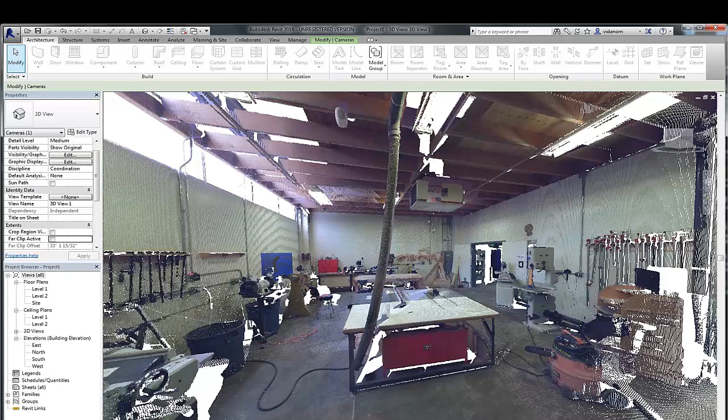Autodesk has made this possible. We have an AutoCAD division, they have a building design division, we have an infrastructure division, a mechanical division. Now they have a reality capture division that's focused on delivering the physical world to be able to compute it, make it accessible, and make it useful for everyone.

So it just started over a year ago, maybe a year and a half ago, and within such a short period, we are now capturing data with all sorts of design tools, 3D scanners. We're using photographs, we're using hand scanners, we're using iPads, sensors, you name it. If you can think about it, we're capturing the information and putting it into the design deliverables. And what tools do we use to do that?

Autodesk Recap. Recap allows you to load intelligent 3D data, either from scanners or from photos, billions of points at a time. Recap is a single word. It's kind of confusing to people. Hopefully everybody understands now it's reality capture. But there's multiple versions of Recap out there. Whichever one we're working with, and we're going to break these down today for you, the goals and ideas are right here: end-to-end workflows.

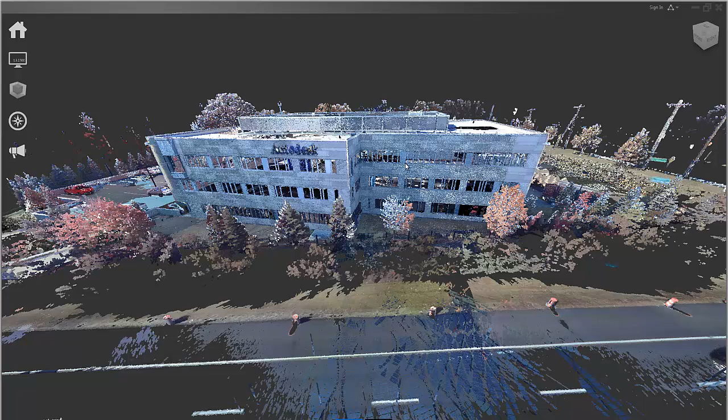Scans are taken anywhere from a minute, maybe a minute and a half if they're black and white, up to 5 minutes using color. So what are they useful for? What can we do with it? Well, at any time I can pull any distance from any XYZ coordinate that was captured in here.

If you zoom in a little bit, you can see that every single point in here has an XYZ coordinate. And as I zoom, you can see each one of those points. And each one of those points is information that we can use to gather the distances.

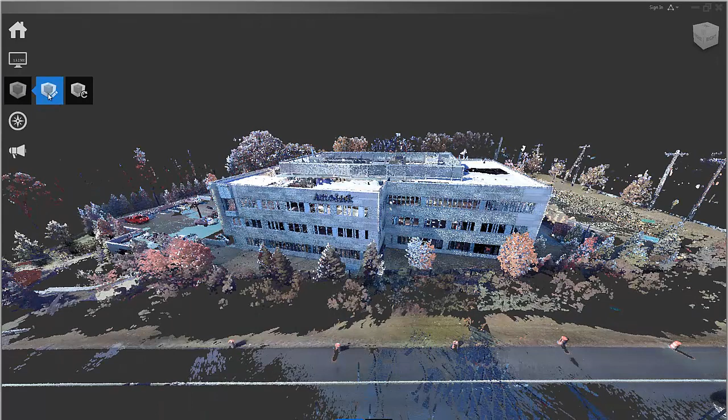Besides that, let's have a little bit more fun. We can go in here and we can create a limit box. Inside this limit box it's pretty easy to navigate. You just drag this down. And we'll go underneath it here and we'll drag this up real quick. Narrow down the data. Let's get it quite a bit closer quickly.

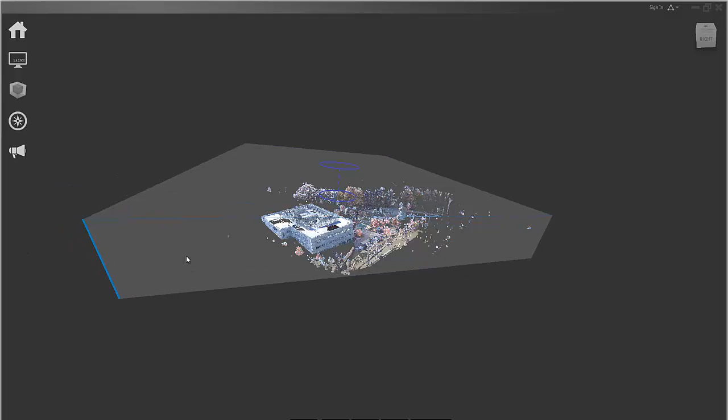There we go. Some of you already saw what I did. I was able to actually rotate this as well. So if you want to go up and down, or depending on which side you grab it, you can rotate it as well. So if you want to go perpendicular to the building, you could do that as well.

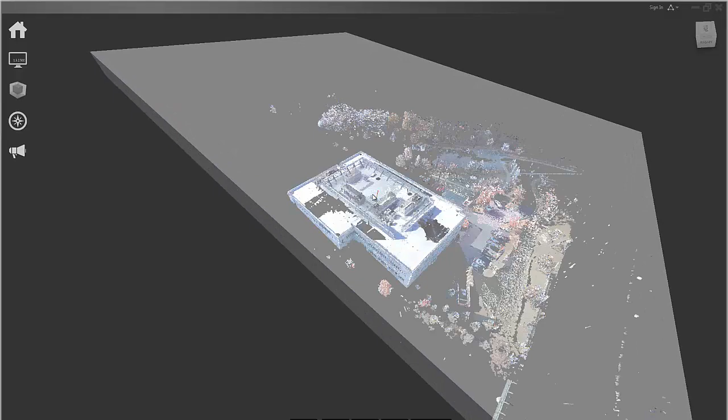Once you're done, you can simply confirm this. And you can always go back and modify it again. And what's really cool is you can just drag this and you can literally look directly inside the point cloud. So we can drag it from both directions. We could go this way. I could go underneath it, and we could drag it as well.

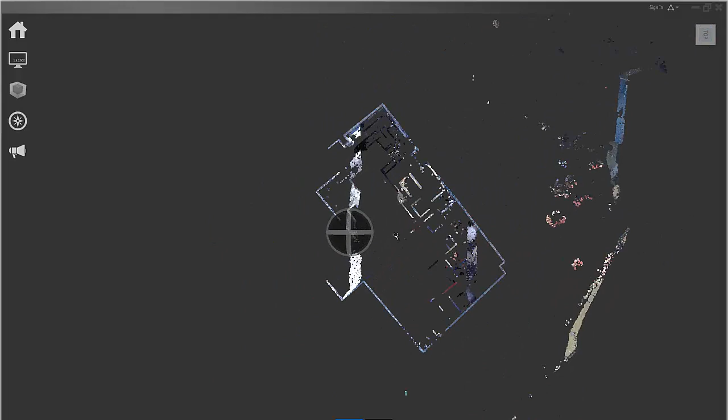There's also options in here to change it to grab the inside face or the outside face to fix that or make it a little bit quicker. But now we can launch this back to 2D. Right? And from 2D, I could take this to AutoCAD and I can start drawing directly on top of this. Or I can take it to Revit to draw directly on top of that.

So just keep that in mind. The most important thing, and you're going to hear me say it 10, 20 times during this WebEx, is we need to narrow down the data to focus on what's important for this project.

Another way to grab or save what I just did is you can create view states. Any limit box, if you like it, you can save it. So I went in here and I quickly made one of just the lobby. I zoomed in, saved it, and now I can return to it at any time.

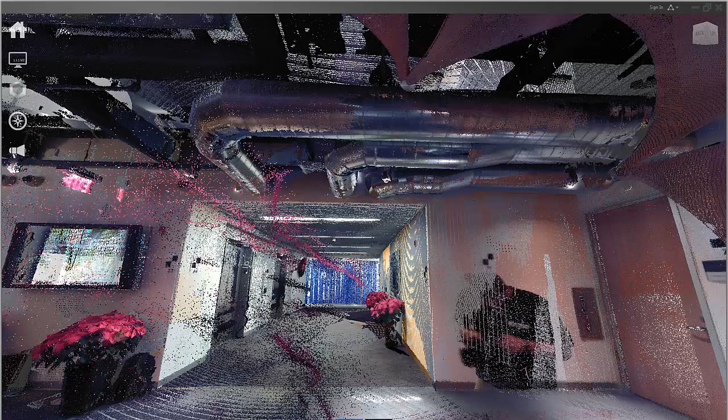It makes it really easy to collaborate with our consultants, our design team, if we want to talk about, let's say, just the piping up above. In this case, I could go in and we could window just these pipes to talk about it maybe later on. Simply fence the information that you want.

Once it's fenced, I can go in and I could say clip everything outside it. Now the point cloud is focused only on what's important to us on this project.

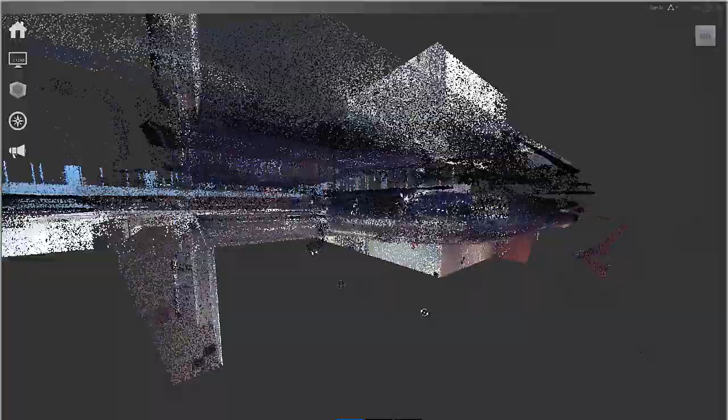One of the tools inside Recap that everybody forgets about: at any time I can go up here and we can export that information that we're looking at as its own RCS file. So now I can work with it inside of Revit or AutoCAD or any of the design information available to us in Design Suite.

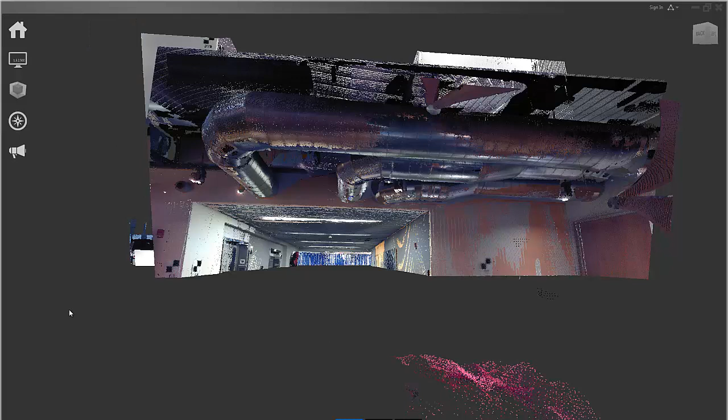Let's undo that real quick. Just want to point that out, how all the data is so accessible and how easy it is to access. I call this the Google Room.

Again, we have a virtual site that we can share at any time. This project might get delayed for 6 months, but it doesn't matter because I captured it. I don't have to remember every measurement or what was there. I can just go back to it without going to that new location.

I call this the Google Room, because this is where we can brainstorm. We can sit down, talk, and discuss different things about how we're going to approach this project, including what measurements the person who went in there might have missed, and put it on a piece of paper.

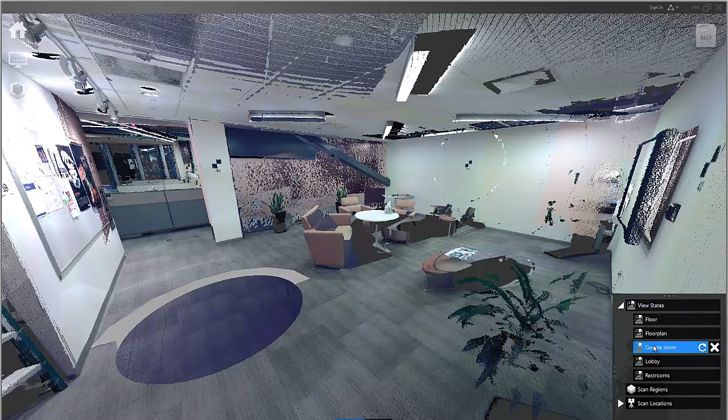Would you bet in this room that you could get every single measurement? Would you bet your job on it, or would you want to go back? In here, we can go in and pull any measurement that we want.

The measurement shown here as well, we can adjust. If you don't want to use metric, you can go to your options and show feet and inches to the 1/8, which is kind of cool. If you don't like that measurement, you can also get rid of it.

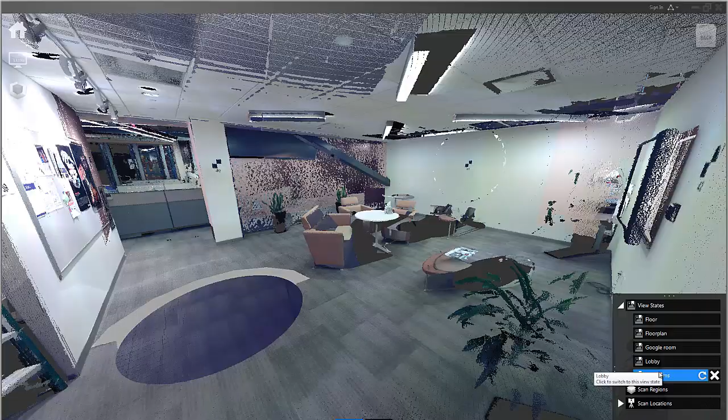So again, saving your views. A couple other ones we looked at: the lobby, the Google room. We can even go to maybe the plumbing, or take a look at the restrooms. I'll spare you actually going inside the bathroom.

I think everybody knows what bathrooms look like, but we could simply take any measurement we want, or make sure we document everything that was inside there before we tear it all out and put it back. You can see the lights up above, the drinking fountains, and the restrooms.

Once I go to Navisworks, I'm going to show you this exact same view, or a close area of this model as well. So looking at the viewport, the scan data is great, and the virtual information is available to us, but what else can we do with it?

Kind of like I was trying to show you a little bit ago, I want to make a floor plan. All I do is take that limit box and put two together, and now I can export this and take it to AutoCAD and draw on top of it.

Maybe I want to take it into Revit and use this as a guide, to make sure I didn't miss any walls. To have a Revit BIM model, I can literally take any existing conditions now, capture with scanning, draw it, and just like a BIM model you would for a new design, I have it for any existing building that I scanned.

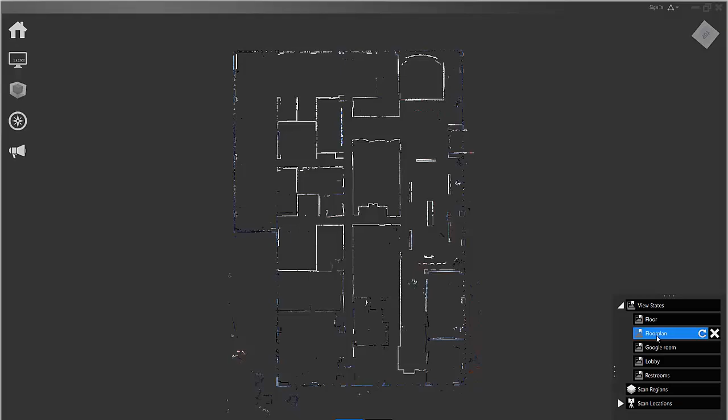Alright, this is the most important thing I'm going to show you today. It's not a perfect example, you need to use your imagination a little bit, but this tool right here can make a big difference during the design phase and how you work with point clouds.

We're going to go in and simply select plane. I'm going to change it so it does a little bit thicker depth, and all you do is pick 3 points on a plane, in this case a floor, and the software automatically uses an algorithm to find the nearest points and create a plane all the way through this floor.

Now I can segment each little area if I want to. In this case, I want to do it really quickly just to show you the possibilities. Why would I do this, and what good is it, right?

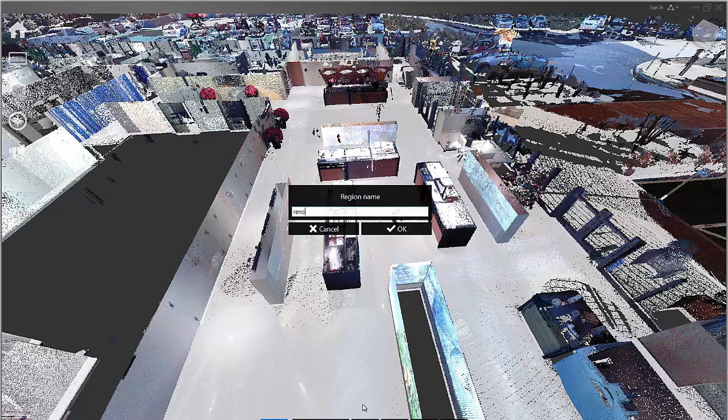Well, what I want to do is go in here now and create a region. Let's call it renovation. Once I have the renovation region completed, or maybe I just want to call it floor, the idea is this gives us all sorts of possibilities.

We can do a couple of things now. I can export just the floor and bring that into Revit or Navisworks to do my new design. Or I can take it a step farther, go in and create a fence, and get rid of all the information that I see on this floor.

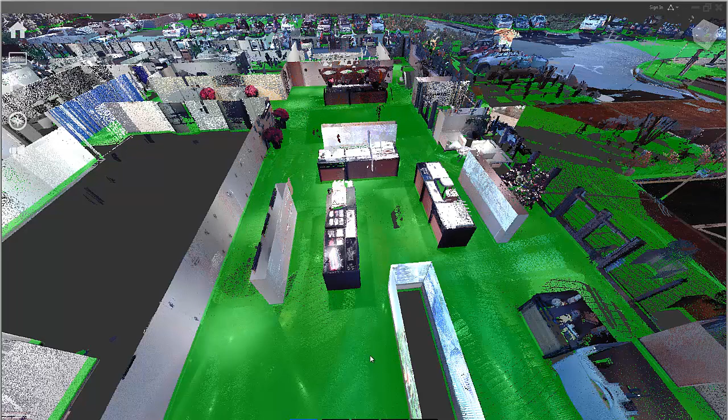Whoops, before I do that, let's make one important detail for this region that you created. There's a renovation - make sure you lock this. Once it's locked, now go over and create your fence.

Guess we get rid of the flowers too, whatever we want, anything on the floor, any interior walls. The idea of doing this is for a couple of reasons. Number one, if the client wants to demolish the entire first floor, gut it, put a whole new flooring system in, we need to put everything back exactly the way it was. If I have little hand sketches and say we measured everything, can I really guarantee I put it back exactly the way it was and all those measurements were confirmed and accurate? No, they're taking my word for it.

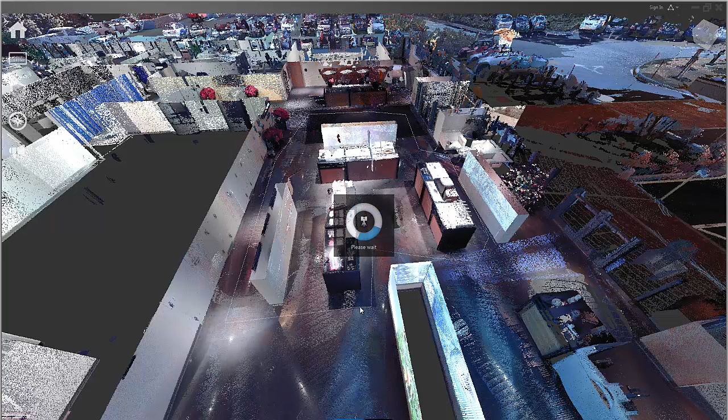If I go back to this virtual model, I can show them every single wall and every single placement of every object they had from this virtual space that was captured. But we can take it a step farther.

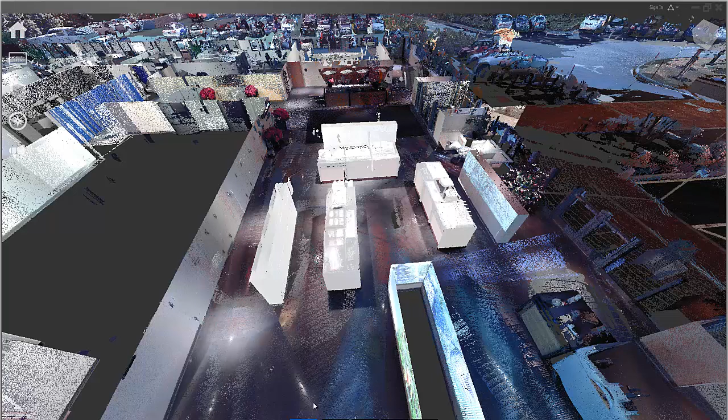We could take the whole first floor, go in here, and for this region, let's just call this one furniture. Well, maybe this is steel, maybe it's MEP, maybe it's HVAC, maybe it's just interior walls. Whatever it is, we're using our imagination a little bit here. I don't have time to break it down for everything, but now I can just turn this off.

With this information removed, I can pull this into Revit, use maybe just the exterior walls and some of the main foundation walls for the interior, and start designing my new renovation or new workflows, my intent for the design of that new building, to show it to the client. And if they don't like it, I can just go back in and change it. I have a virtual model to do whatever we want with.

But this simple little key here makes all that possible throughout the Building Design Suite.

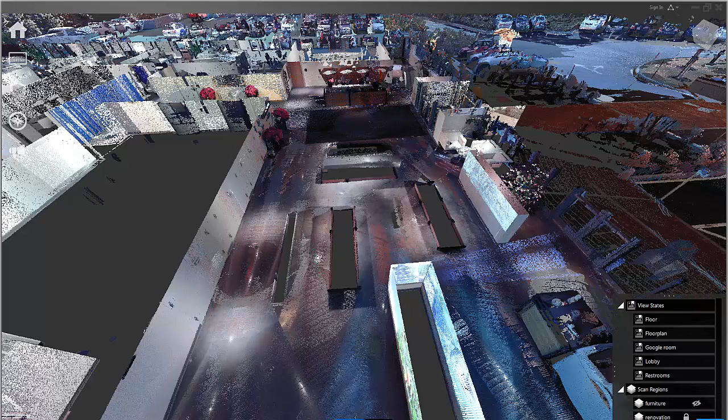Now, make sure you go in and export this if you want to preserve the point cloud exactly the way it is now. I'm not going to do that, I'm just going to pull it into Revit to show you. But if you do this step, you need to export it, save it as a new, updated, renovated point cloud, however you want to do that. The information's still here. We can go back, turn it on and off at any time as well, which is kind of cool.

So hopefully everybody gets the idea of what we can do with Autodesk Recap. This comes directly with the Building Design Suite. You have the icon on your desktop, and it's seamless and very easy to navigate and work with point clouds.

All right, that takes us to Recap Pro. Recap Pro does not come with the Building Design Suite. That is a separate software that is available to you.

What that does is allow you to register multiple scans together. There's no way anybody scanned the outside and interior of that entire building with one scan. So as you move with a 3D laser scanner throughout a building or a construction site, how do you put those together? How does scan 1 relate to scan 2?

Well, if you look around your room that you're watching this webinar in, the scanner only does line of sight, so only what it can see from that one location. From that location, you can move around multiple locations and just hit scan, capture the information, move it 20, 30 feet, hit scan again. As long as you have overlapping data, you can put it together, kind of like a puzzle. Each piece from one goes to the other and puts it together. It's called registration. So you can also use survey control to put it on exact locations in the field.

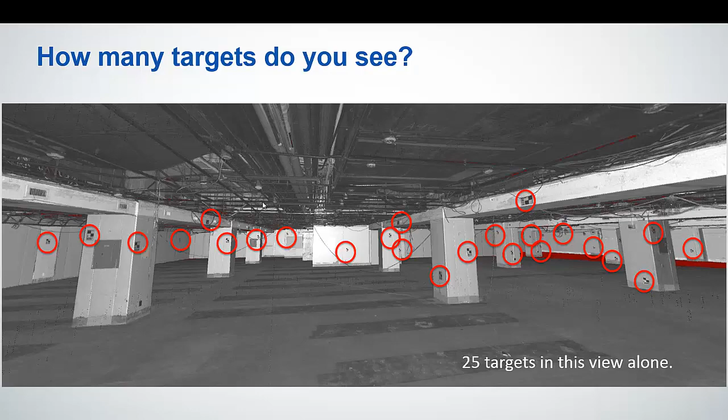But back to our focus: the time it takes for pre-planning and registration, with a lot of targets. Well, now you no longer have to use targets. You can simply take your scanner out, hit scan. In a minute and a half, you've captured all the information visible from that single location. Move 20 or 30 feet, hit scan again, and it captures more, as long as you have overlapping data.

In other words, scan a room, put the scanner in the doorway and scan again, go outside the doorway 20-30 feet and scan again—now we have overlapping data. In 2D view, shown in the bottom right, we pick 2 points on a wall that match, or are very similar—they don't have to be exact—and an algorithm uses the overlapping data from both point clouds to register them together. The best part is it's easy: green says go, it matches; yellow says you might want to pick new points or just check it looks good; red says you picked the wrong points and you're so far off you better redo it.

If you go to 3D, since not everybody's eyes work as well in 2D, you just match 3 points—match the exit sign to the exit sign, a cabinet to a cabinet, any plane to any plane. It doesn't have to be perfect, just within a fair amount. Maybe I pick just below the clock in one scan and below the clock in the other, and it gets a green light saying the algorithm's good, and you move on. No more targets—targetless registration.

Again, this is an add-on package. You do get Recap for free, but Recap Pro is software that is available to you separately.

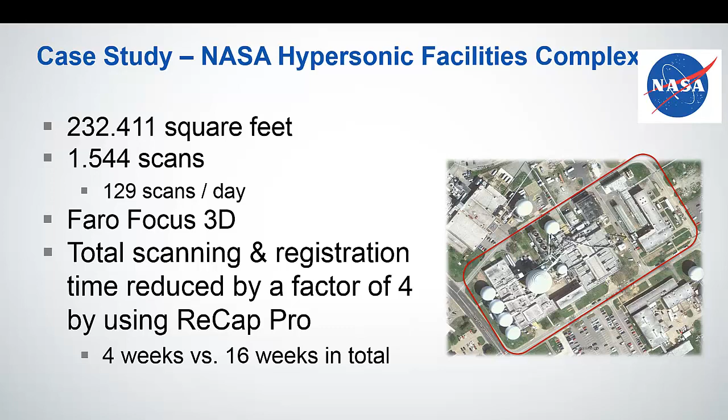Maybe not. But either way, NASA did this test. You can see the area that they scanned. It's definitely verified and shows you a very good workflow. So that was very cool. I suggest everybody go out and try this. It is very easy. I also suggest that you do have a professional or consultant maybe go with you the first time. When things are going right, it's super easy, but if something doesn't go perfect, it's nice to have someone to talk to help you out.

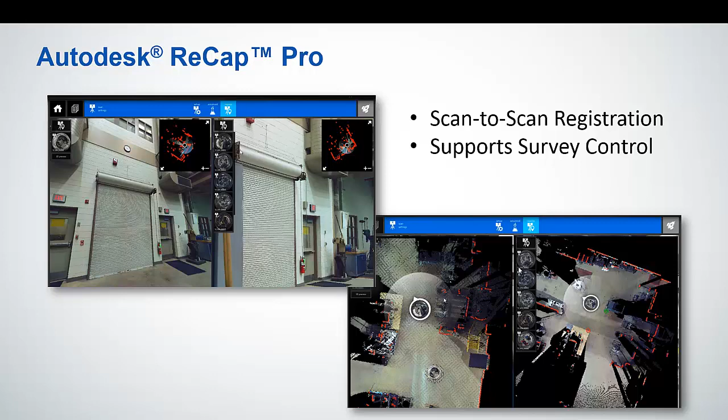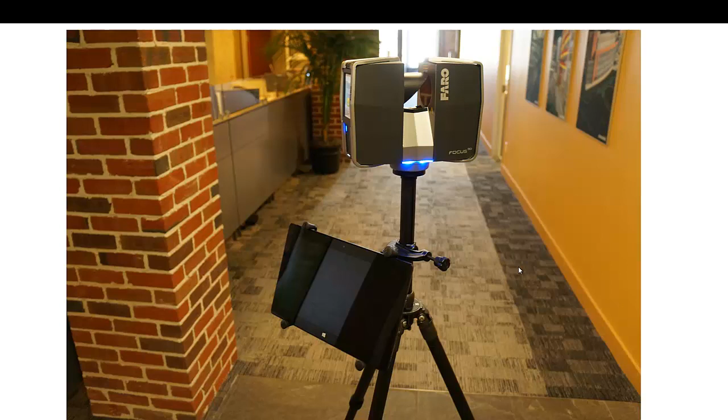Seriously, all you take is a Windows Surface tablet and you put it on the tripod and you move the scanner around again every 20, 30 feet. And it's going to automatically download the scans to the tablet, and it will use the location and an algorithm to match up the pertinent information with the next scan and automatically register it together. No oohs and ahs for that one. It's going to automatically do it. You don't even have to click any buttons.

So imagine just moving this every 30 feet, scan a minute and a half, move it 30 feet, scan, minute and a half, and you're done. It can't get any simpler than this. Well, maybe a little simpler. Auto registration is great, but they do have other methods of capturing data besides 3D laser scanners. They have handheld scanners. The point is, as scanners and technology go forward, capturing the data is going to get easier and easier.

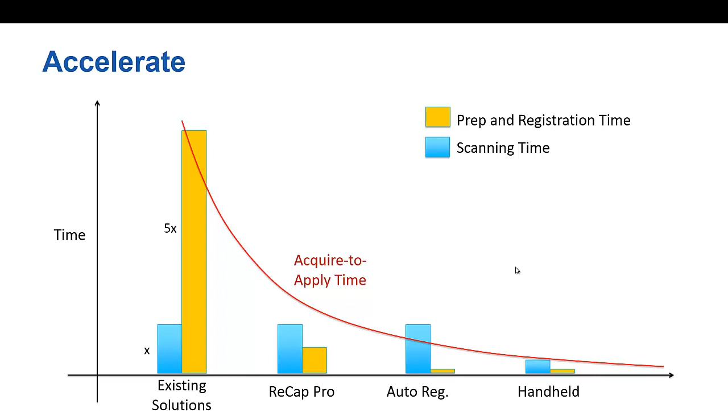What's important is we have the software that can handle the information coming in, and we can create the construction documents that we need no matter what the tool is. This is an example of how the time is getting quicker and the software is getting better. This is an example of a handheld scanner that allows you to capture within 30 feet the information you see within 10 minutes. I actually have an Occipital Structure Sensor. It's about a 3-inch tool by about an inch that sits right on my iPad, and I can capture data directly from that into my iPad. It's incredible where the technology is going.

Capturing the information is not going anywhere. Everybody's talking about drones and UAVs with video and pictures, which is incredible. So the Autodesk product line will help with both, right? We got a point cloud viewer. We can work with huge data sets, and we allow segmentation to break it down. We can bring it into AutoCAD or leave it in Recap or Revit to do measurements and manipulation.

But what about Recap 360? I mentioned Recap comes with the Building Design Suite. It's already on your desktop. We have Recap Pro now, which is available as an add-on. And you have Recap 360. Using Google Chrome, I can just go out to the website. I can literally take photographs of an object.

If you don't have a 3D laser scanner, take your iPad out today or your Android. I definitely encourage this. Take a picture of your computer, your iPad, your laptop. Literally just take pictures with 40% overlap. Go around it. Start at the bottom, take pictures, go to the middle, take pictures, and then take pictures of the top of it. Upload these photographs, and it will automatically come directly.

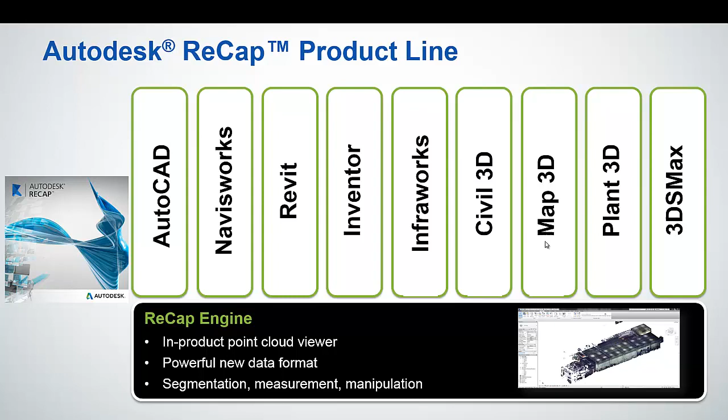So these are the products that we can work with directly from Recap. So if we want to talk about 3D point clouds or we want to talk about photographs, however we're getting that data or capturing that data, these are the tools that we can use to create those deliverables. Today we're going to jump into Revit, then we're going to jump into Navisworks for the construction side of it.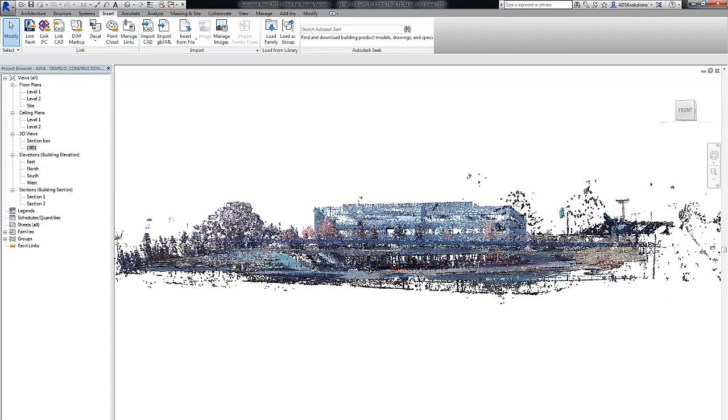So talking about Revit, I'm just going to switch over real quick here. Literally, this is a point cloud inside Revit 2015. You can pan and zoom, and it seamlessly moves the point cloud directly in Revit. Literally, I have a building sitting inside here, right? This is an existing building. It's not a BIM model.

The goal would be, typically using Revit, that I take this information. You don't have to model it. Back in the day, 1990, we modeled everything. Look what we can do. You don't have to. You can use the point cloud and do your design around the point cloud. Remember how I did in Recap? I just gutted the whole first floor. I can just take this model and I can go in and start drawing new walls or renovations off of these point clouds. If you want to model it, you can do that as well, but you don't have to.

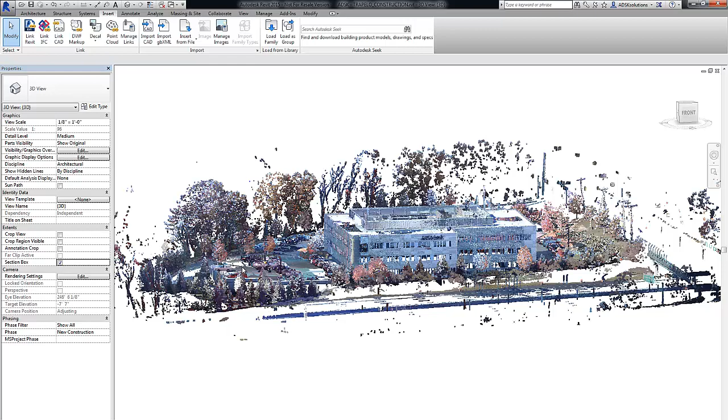The idea is that you want to show the client how easily you capture the data and then show them your design and what you can do conceptually. Then, once you win the bid, we can go in and do our BIM model. What's a couple of tools we can use for this? One of the simplest ones is you can use a section box. Hopefully, everybody's used Revit before. I'm just going to show you some of the basic tools that we use every day in Revit. The only difference is I'm using these tools to work with a point cloud.

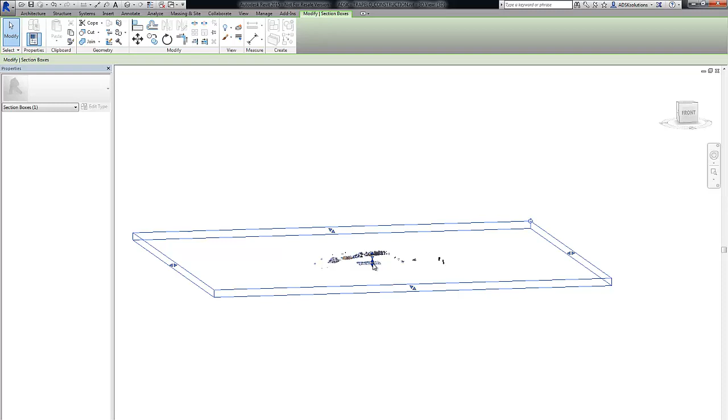Section box, everybody uses a section box, right? So we just drag and drop this to show or to hide the data in the point cloud. Guess what? This is exactly the same thing I did in Recap. So again, I'm going to keep beating you up over this. The idea is you have to narrow down the data whenever you work with a point cloud. No matter what, the data we can capture is incredible. You just have to narrow it down to make it useful.

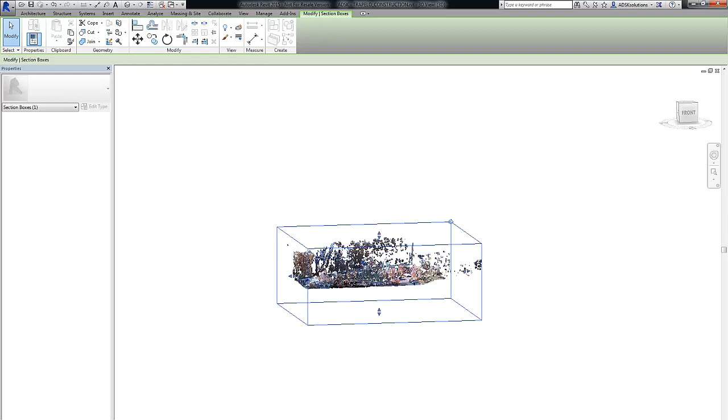A lot of times I'll be working with a client and they'll tell me the point cloud's not accurate enough. There's so many points in here. I don't know exactly which one I should work with. If you think of an existing building, an old 1940 building, if you measure along the floor and you gave me measurements, and you tell me that's the most accurate way that you can capture within a quarter of an inch or an eighth of an inch, and that's more accurate than a point cloud, I laugh. I understand why beginners or novice people think that.

But go measure the top of that 1940 wall in that building. Walls are not perfectly built 90 degrees. So depending on where you do those measurements is only how accurate you are. You can be off. I've seen a half an inch to 6 inches depending on where you're measuring that information at.

We have all the design. We have the virtual model. Take any measurement we want. We can cut it at 4 foot. We can cut it at 8 foot. We can cut it at 10 foot. And we can get that measurement for you. Or we can draw directly on top. So this is a 3D section box. Very easy to see in here. Again, I just didn't want to bore you with navigating this to help you see that. I also like going to the site view.

From the site view, again, you can narrow down the data that you want to look at. One of the things that I like in the top view is going back to the property box. And there's a view range. Inside the view range, we can start telling the program what's important to us. We just want to draw exterior walls. We want to draw interior walls. In this case, I don't have the interior walls just to make it a little simpler for everybody to understand.

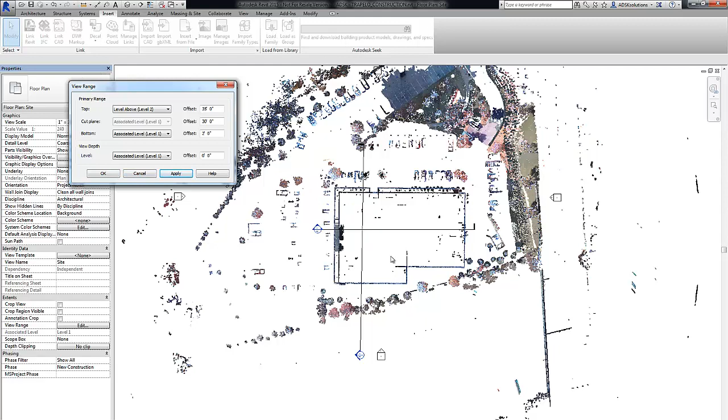Okay? So typically I'd probably set my guides, and my guides are going to be in my section view. So I can change my level elevations here. But the idea is I create a section. I move my guides to be level 1 or level 2, wherever you want to set these. So when you go to draw your wall, typically maybe I drag this one up to here if I want to draw that wall. Again, I'm not going to go through Revit fundamentals, but I think everybody gets the idea.

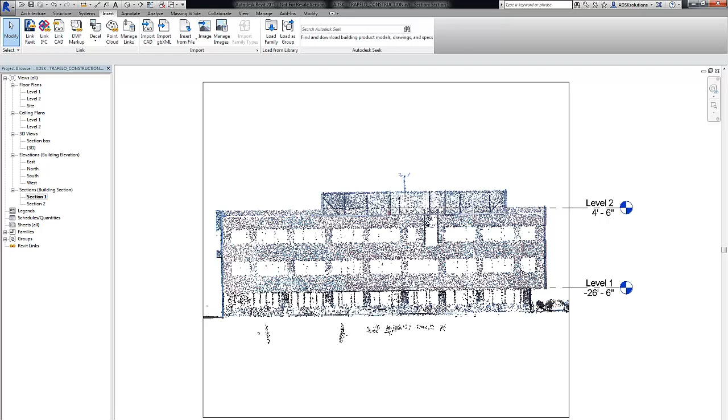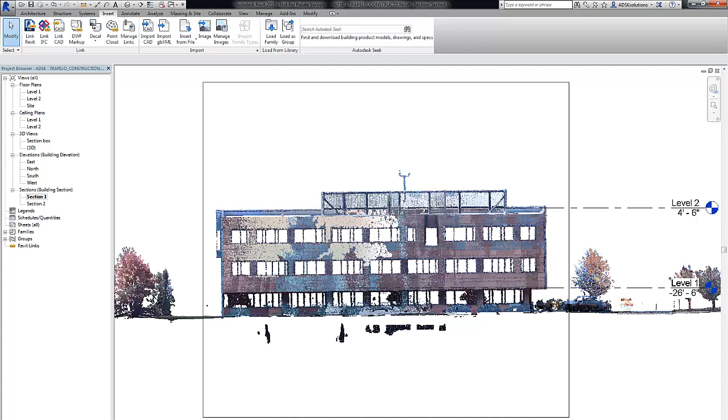The other big one I wanted to point out is make sure you use the crop tool. So we can go in here and tell it to crop or not crop this information in any viewport. By doing that, it's going to simplify the data. I don't need to see the trees. I don't need to see the rest of the site. We just go in here and simply tell it to turn on or off the cropping tool. Right? Very simple. Draw a box, crop it.

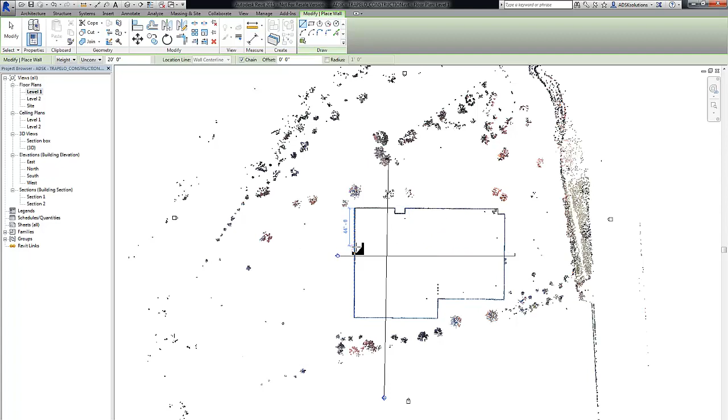Another tool you can use with point clouds. Once we have the sections, we have the guides. Now we can go back to level 1. Zoom in here. Again, the basic fundamentals of Revit. We can go in, say I want to draw a wall. I just want to show you real quick. It will snap to these walls, and we can start drawing. I'm going to zoom in a little bit. But basically, if I go to my elevation view, it's drawn from one guide to the other. I drag and drop my doors and windows in the right places for each of the elevations as well.

And I have a model from ReCap that was brought to me from scan data. So again, you're looking at the whole model here. So just a reminder, just go in there and crop that data, and you see your guides, and you can see that model, or you can see that wall if you set it right. So very easy tools to manipulate the point cloud or to get the information I need. You don't have to model everything, just model what's important to you.

I'm running a little bit out of time here, a little bit behind.

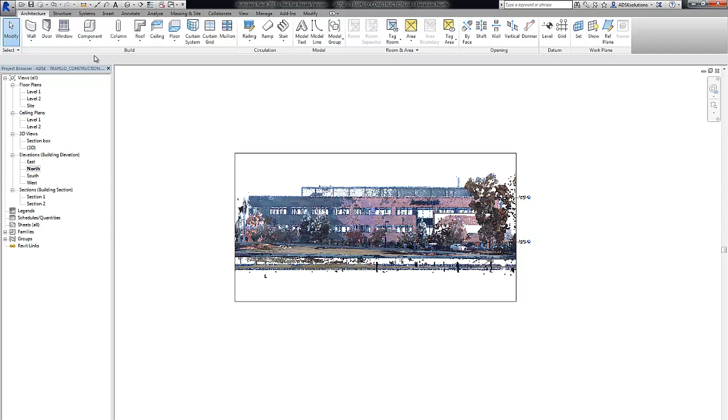So I just want to show you, if I did take a little bit more time to create this model inside Revit, or if I want to concentrate maybe on cross sections, construction documents, you can see the point cloud goes right along with the actual BIM model. See the steel and the foundation, and there's my point cloud as well. Still very seamless to pan and zoom. All the sections, all the simple Revit tools that we're typically using will work. We just happen to have the point cloud in there. We can turn the point cloud on and off at any time once we have it verified or do our verification.

Alright, so Revit is a great tool when we take existing conditions and we want to create a model. Maybe you created that model and you just want to compare the two. Back in the day, I used to watch technicians, architects, designers. They would design in Revit. Well, let me start here. You couldn't even get the point cloud into Revit back in the day. So you would actually open up Revit and create your model. Then you go to Navisworks and you bring in your point cloud.

Then you would link your Revit model in here, and you would compare the walls to make sure you're doing it right, or if they're accurate. Oh, that's 2 feet. You go back to Revit, you move it 2 feet, you open it back up in Navisworks, and then you see if it lined up again. Now it's so much easier. Take Revit, draw directly on top of the point cloud, but go to Navisworks for collaboration. Go to Navisworks for review. Go to Navisworks to work with subcontractors that maybe aren't supplying Revit.

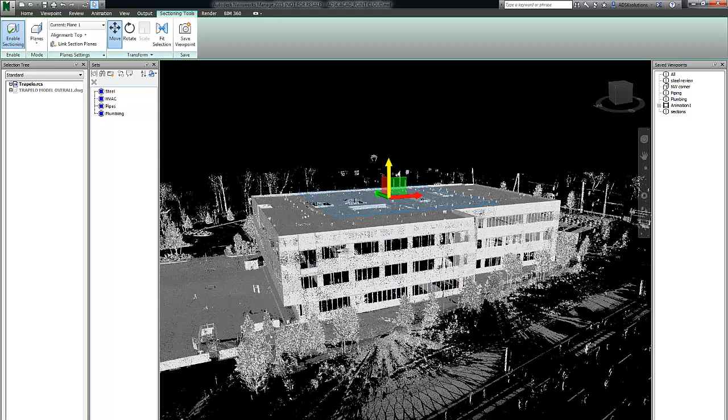You know what else you can do with your point cloud? This is not a perfect example, but let's say I wanted to do the construction phase. I took the point cloud and we want to use the exterior walls, or in this case, I turn the exterior walls off. I made just an interior walls point cloud. I bring just that RCS file in.

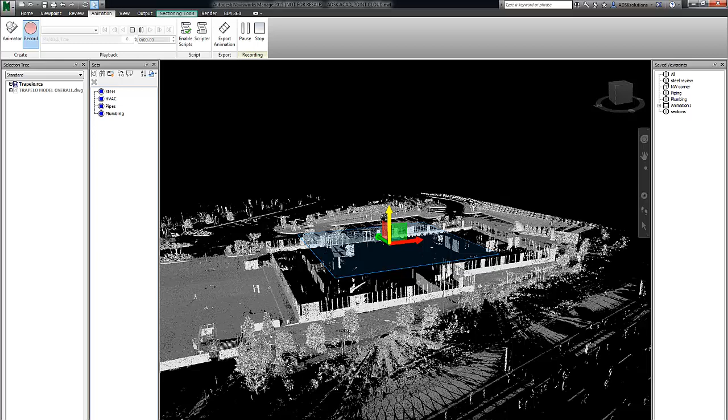You can simply go over here, go to animator, we hit record, and we can tell it to record how it's getting built of just that scan data. Again, I brought everything in, right, to save a little bit of time. But once we have this recorded, I'm going to stop this quick. I'm going to go back to the section tool. I'm going to turn this off. And now I can just replay this animation, right?

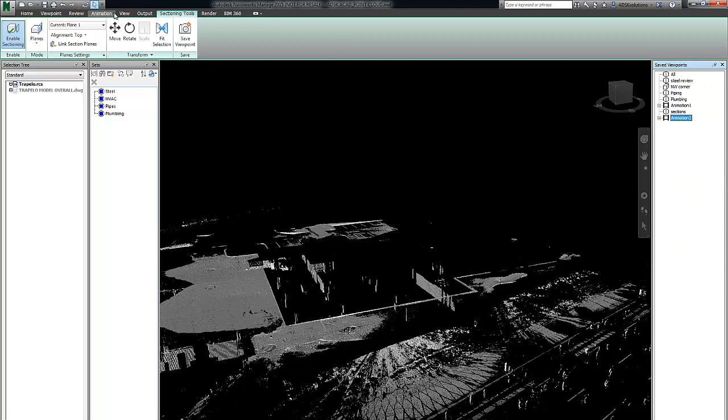Animation 2, do playback. So point clouds are able to be animated, right? And I think there's a lot of power in this as long as you break it down in ReCap and you segment it out to bring it in here. Otherwise, it's going to do the whole point cloud all at once.

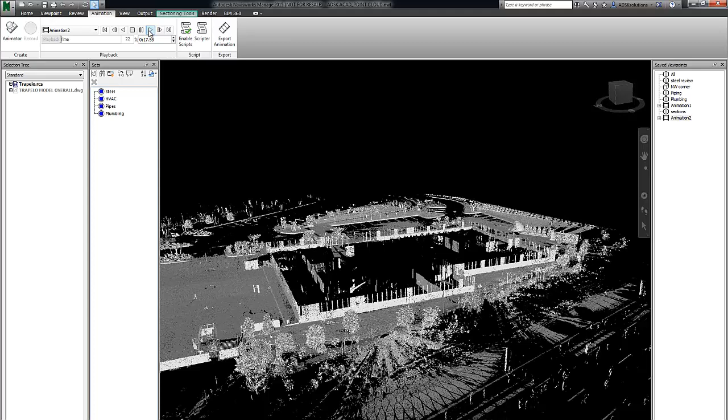But again, I could have had just the floor. I could have had just the exterior walls. I could have had just the steel going up, right? You're showing that intent to the client from conceptual design or from an existing standpoint without putting much effort into this at all.

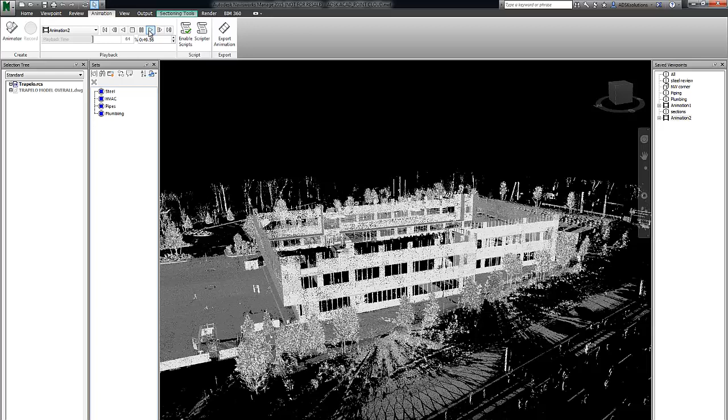Let alone at any time, your actual Revit model or your design can also go in here just using the shell of this building. So just using the exterior walls of the point cloud and then use the animation for the Revit information as well. So kind of cool. Point clouds can be animated, which is nice. I want to show you that.

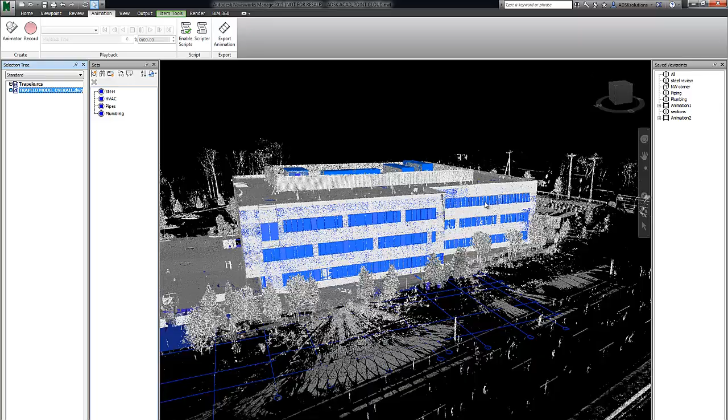The other idea is we can go in and we can bring in that Revit model. Or in this case, I just have an AutoCAD model, so I can make sure it shows well to everybody here. Again, break it down. So what do we want to take a look at? How do we want to look at it? Well, if I zoom in here, it's really difficult to see what I'm looking at.

Oh, let's see. This is already taking me an hour. I get kind of bored. All I see is point clouds. What do I do with this data? Well, by breaking it down, what I mean is break down the point clouds. Break down the data as you bring it in. So go up here and tell it to append another point cloud. Bring in just this first floor, second floor, third floor, interior, steel.

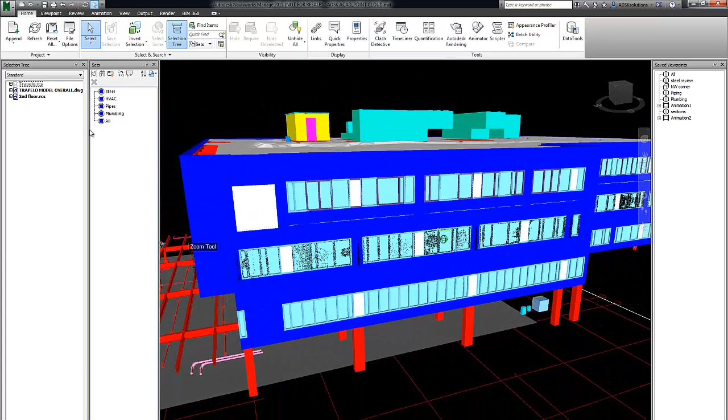As I bring this in now, get rid of the information you don't need. I don't need the exterior wall, so I'm going to go in here and I'm just going to hide this for a second. I click off of this, and now I'm looking at my model, and if I zoom in, I can see the second floor point cloud. Let me show you this a little bit better. Right, there's the second floor point cloud. Again, I'm not using color.

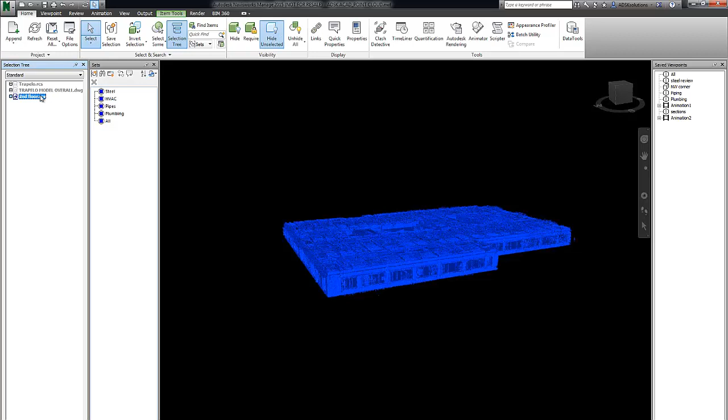Let me bring this back real quick. There we go. So if you showed color, you would see the true colors in there. But I also want to point out you can change the appearance of the information. So I could go in here and change the override on the point cloud color. And again, the idea is the point cloud's great, but that's not what I'm showing here. I want to show the information, the design, or what's changing inside this point cloud.

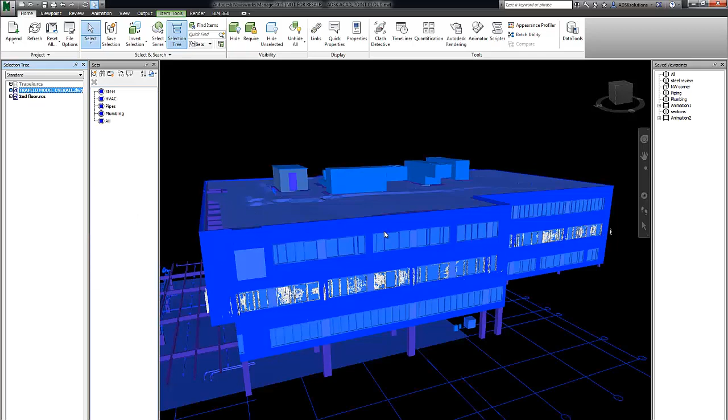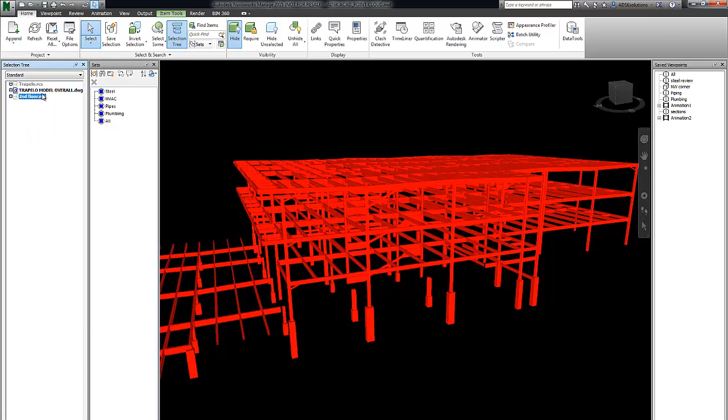So what I can do now is go back, turn on the overall model, and we're going to concentrate on just the second floor. What do I want to concentrate on? Well, let's break it down and show just the steel. So from the steel, I can go in, invert my selection, and I can hide everything else. Don't want to hide the point cloud though, so we go back to the point cloud, second floor, and we turn this back on. I have control over everything that we want to show. Right?

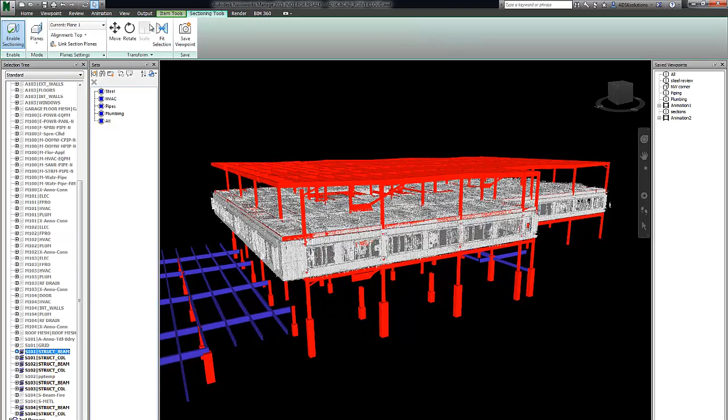I also could break down the steel even farther if we wanted to. And you can see as this BIM model is put together, you have the steel for the first floor and the second floor. So I could turn each one of these off as well, but I don't think it's needed. So we can go in, and maybe we use the section tool again to do that. Let's see how I left this. Now I go in here and I just navigate this down. Right now I'm looking at that second floor. Look at that. I can see directly inside the second floor.

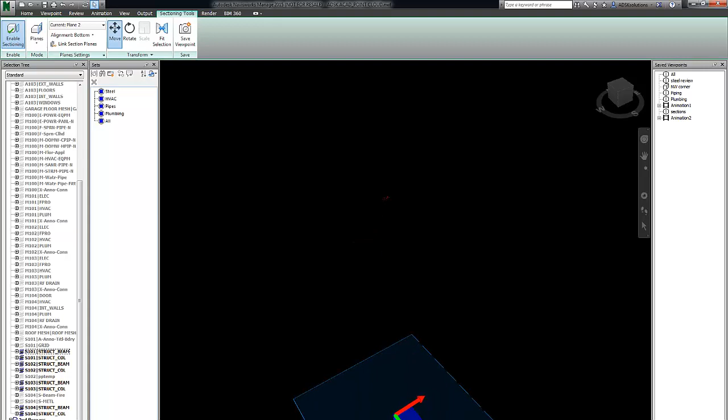If I go back to the second one here, alignment bottom, make sure that one's on. Zoom out real quick. I'm not sure what happened here. There it is. Let's bring it down. It's always a good idea to try and find the model. Oh, must be too far away. See if we can get lucky here and grab that. Got it. Way out there. There we go. Much easier when you can see it.

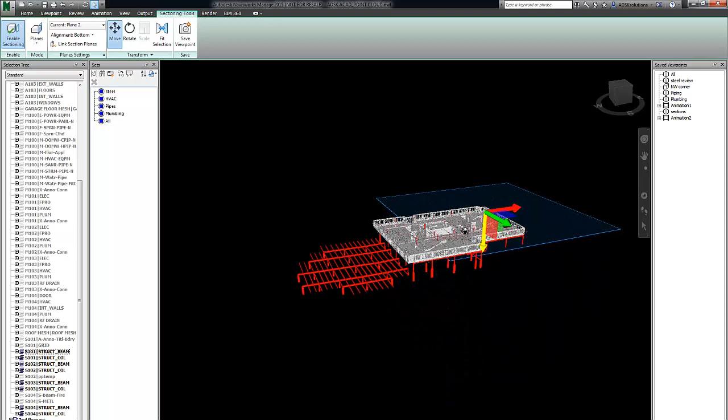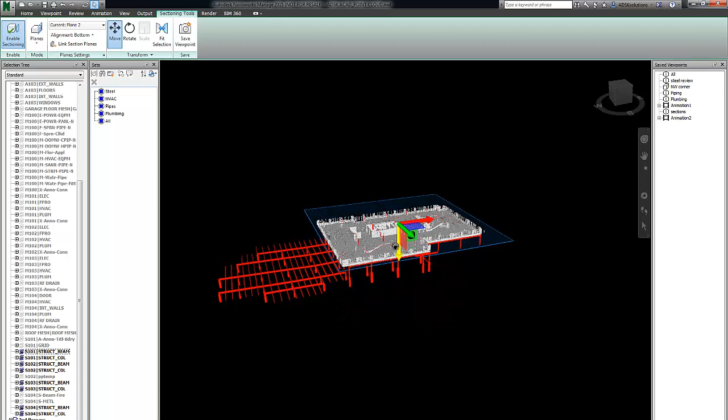So now we can bring this part up, and it's going to clip all the information as well. And should have. Maybe I grabbed the wrong one, guys. Try this one more time. Why aren't you clipping for me? That's why we love these live presentations. That's clipping. We go to 2. There we go. I guess it's just visually off a little bit, but there's the idea. So we can tell this to clip it however we want to.

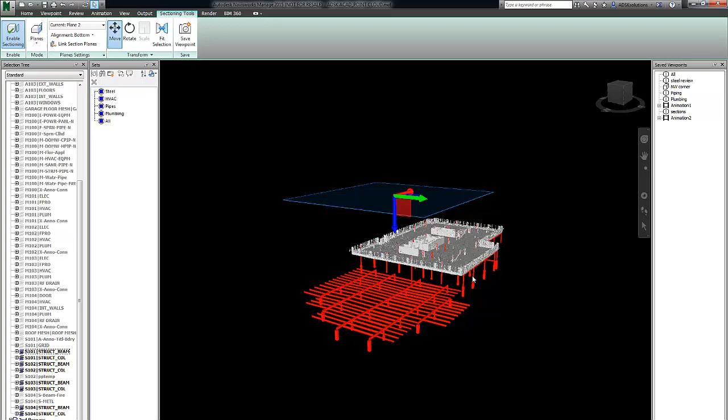Now if you want to do a 2D review, or you can leave it for 3D review, and you can link these sections too, so you move them up and down per floor, which is kind of cool. But now I can go in here and I can actually do a 3D inspection, and I can make sure when we scan that there was the model and there's a steel beam, and that it doesn't collide or have any type of clash detection visually, or we can run the clash detection as well.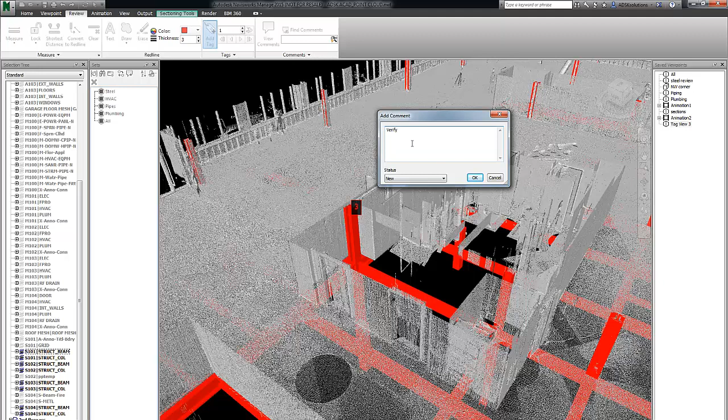Inside here, anything that you want to review or mark, you can go to review, and you can add a tag just by clicking on this. And you can make comments. Verify column exists. Okay. We could verify clash detections. We can again go to a 2D view if we want to as well, and take a look at the information in 2D.

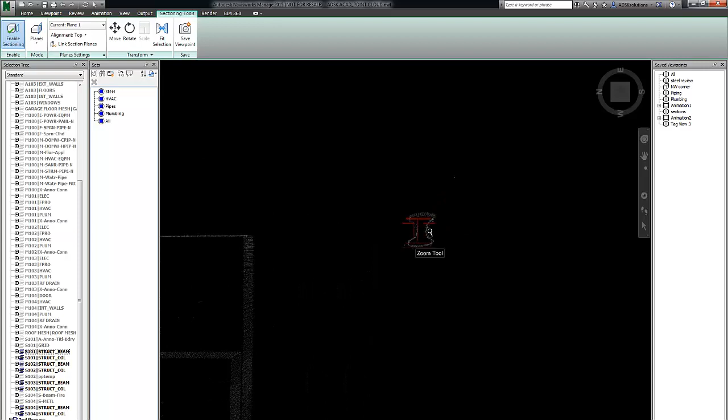We can pan and zoom all the way through here, and you can make sure the columns are still correct, placed in the right location. Maybe it was just an as-built plan that you did, and you just had to field verify that they actually even exist for your new design. Any of these, again, you go in, you go to review, and we just simply tag these. As you tag these, and you set these up for your review,

they don't only make a review, but they actually create their own viewpoint for anybody to go back to. The idea and the goal of this is now I can send it to Navisworks Freedom, and share these markups with anybody on the design team. We can also go in here and take this a step farther, and you could put more eyes or attention on this as well.

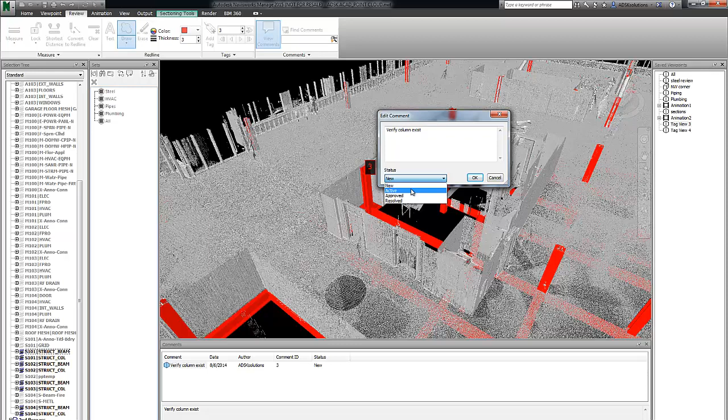And at any time we can go back and view these comments as well. So if I want to go back and say we want to take a look at tag 3, I can see and review those comments. Now if I'm the project manager maybe or the subcontractor, I can also edit the comment, and I could say we need to resolve this, or this has been resolved, and I can even approve this and then send this back for the next person to go back and look at this, right?

This is priceless in the construction field that we can verify, mark it up, and collaborate with design firms. Navisworks Freedom is a download that's available to everyone as well.

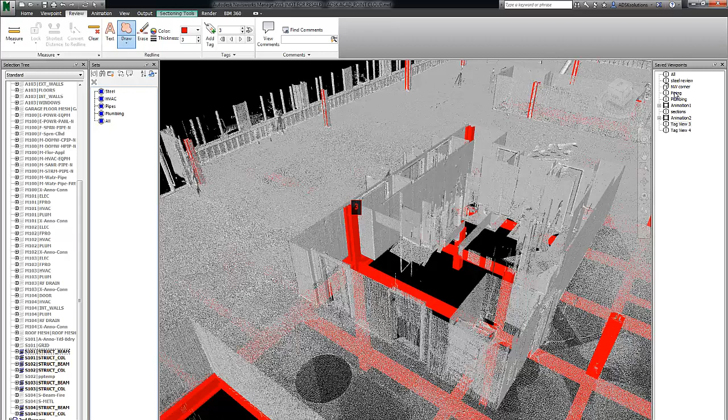What else can we do? We can take a look maybe at piping. To get here, I just go back and use selection sets that are set up, so I can go back to say all and turn everything back on if we want. Or I can manually go in here and break this down by layer or by floor if I want to look for exterior walls, then create a selection set to group these. Once they're grouped, you can turn them on and off.

We can concentrate, just like I did on the steel, just on the plumbing, the sprinklers, the HVAC. We can run clash detection on the point cloud along with the rest of these.

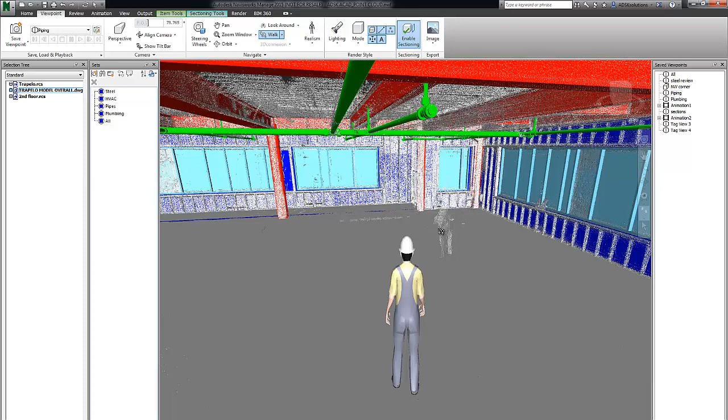But I also want to show during the animation process, like we did earlier, you can go in and set a third person. When you set the third person, just make sure that you have a floor or a fake floor in here. The navigator, the avatar, won't work directly on the point cloud, but you can walk directly on the floor, and the point clouds do stay in here, and you can animate this as well.

Do you guys remember the restroom that I showed you earlier, that entrance? There it is, the exact same thing, modeled, and we're reviewing the point cloud data. At any time, if you wanted to animate that, it would be the exact same tools, and I can go back in and we could replay this.

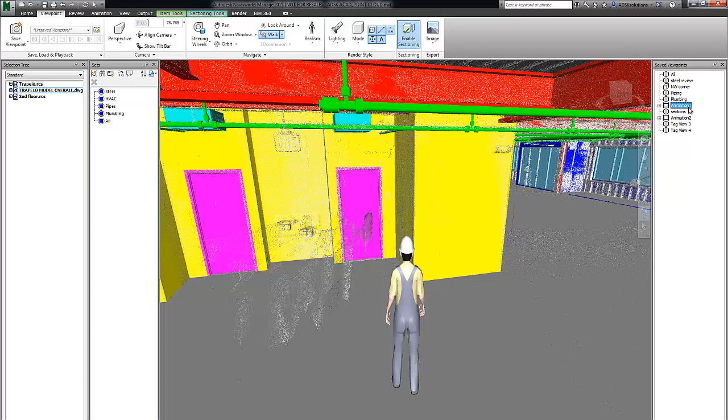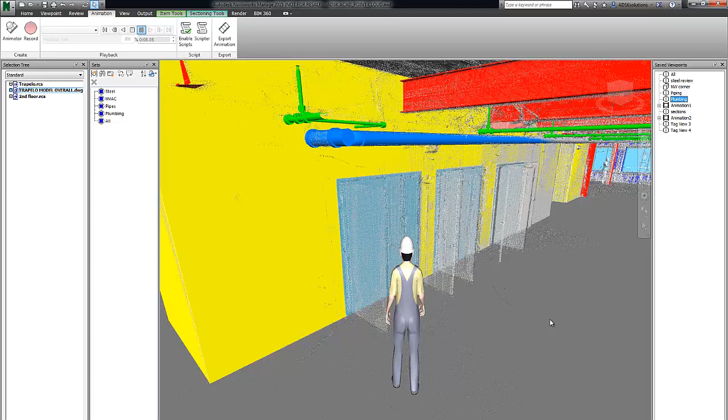So whether it's piping or plumbing, whatever the intent is to verify, keep in mind you can bring in the data, you can break it down, we can review it, and you can see how easy it is using the section boxes to analyze the data, to verify the information.

One other thing you might not have noticed, if you pan and zoom in here, mine looks very clean. As soon as you open the program, go up to options, make sure you go to file readers, set this for ReCap, and change this iteration to 1. Otherwise, when you pan and zoom, you can get great big globs, 8 times the size, and that'll show up in your animations as well.

So again, just go to options, file reader, change this to 1, and now it's going to be nice and clean.

2015 also provides enhancements. There's a conversion mode, so you can tell it to bring it in and do clash detection for each individual scan. You don't have to do one great big giant scan at once. We also talked about breaking it down to individual RCS files to do the clash just on the floor, the ceiling, or just the steel. These three options have been enhanced for 2015 to allow you to do better clash detection with the point cloud as well.

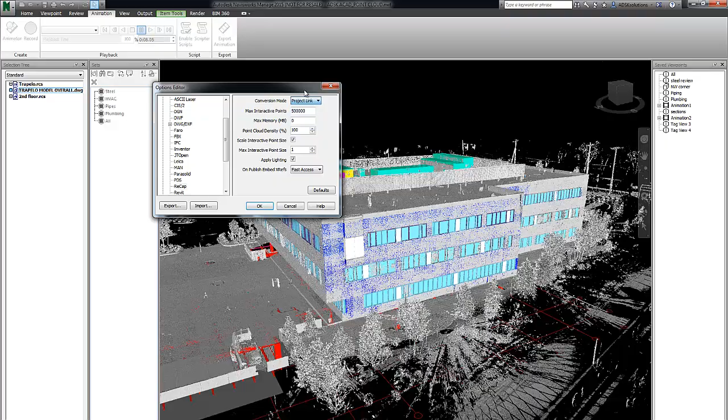The last thing I want to show you is using Navisworks. You can also go up here and publish the data. Once you hit OK, it actually publishes a point cloud as an NWD file. This file that you publish can actually be shared with Navisworks Freedom.

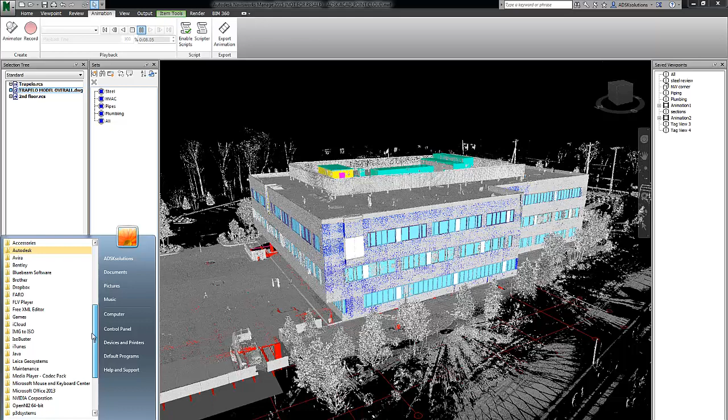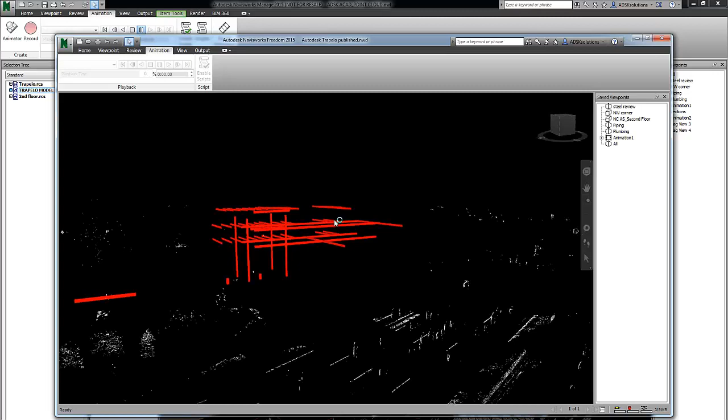There we go, Navisworks Freedom. You can go and download this. It's available right now. You can actually collaborate with team members to open this information or this program. When you go to open it, as long as you publish this as an NWD file, literally they can open it up, and they can have the markups. If you notice over here on the right, the markups and the saved viewpoints that I have are also there for them to go back and take a look at.

So if I go back to piping, if I go back to the steel review in 2D, all the information that you saved before is going to be stored inside here for them.

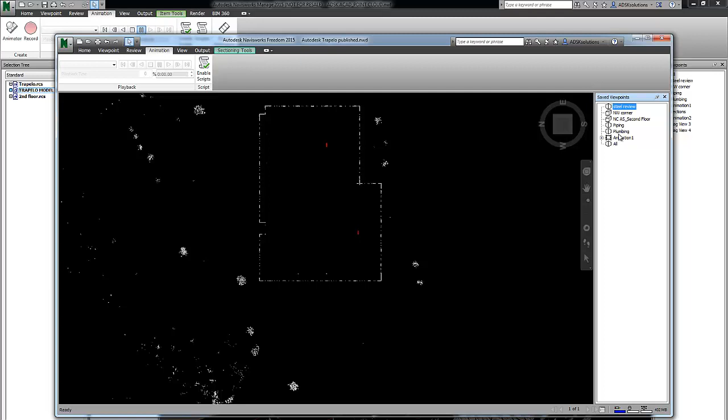Again, the tabs are very similar. There's the home, there's the viewpoint. We have the review options to view any comments that were made, and we can also do our own measurements either from the point cloud or the objects on the site.